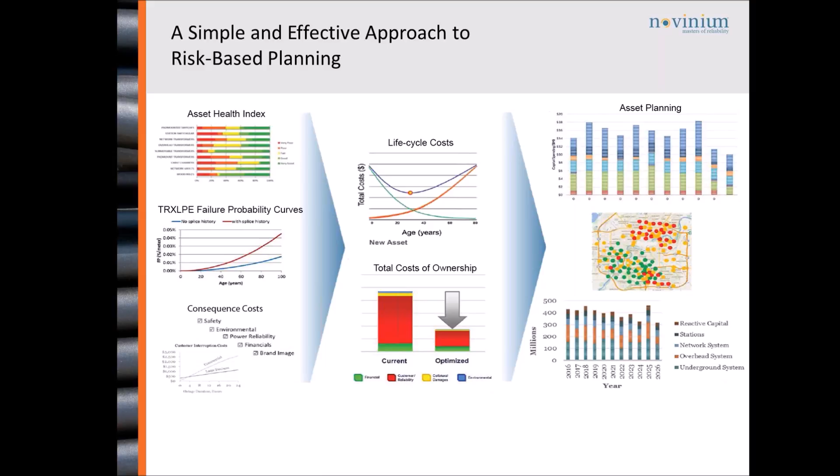In terms of the cable planning approach, this really begins by looking at the utilities' data relating to cables. That includes condition assessment information that can be used to determine the failure probability of the cable, and it also involves the quantification of the cable's impact if it fails. These two components can be used to measure the risk of cable failure, which can ultimately be used as part of a life cycle costing and total cost of ownership analysis.

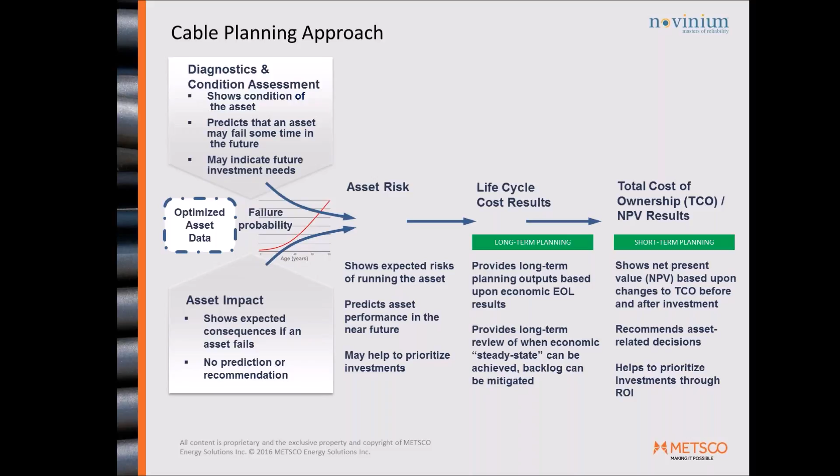So I want to talk about the individual building blocks that we're using as part of this risk-based assessment, beginning with the cable's condition assessment or health index. How do we develop a health index for cables?

Well, we start by building an architecture with the help of subject matter experts at a utility who have knowledge of the specific types of cables or subtypes of cables that are introducing problems within a given distribution or transmission system. We also look at all of the different types of data available on underground cables, including testing, maintenance, and inspection information. From all of this we're able to develop an architecture that can be used to quantify individual health index results for each individual cable segment.

That will be done using the individual cable's asset age, the inspection data and local data that we have on that cable, as well as degradation factors which are individually weighted as they relate to the overall probability of failure of the cable asset.

Some of the issues that we've seen with polymeric cables, especially those installed between the 1970s and 80s, include water tree phenomena, imperfections with respect to the jacket and semicon, and this can lead to issues such as overheating, partial discharge, and leakage around the splice, joint, and terminations, tracking and erosion. With oil-filled cables, we also see dryness phenomena.

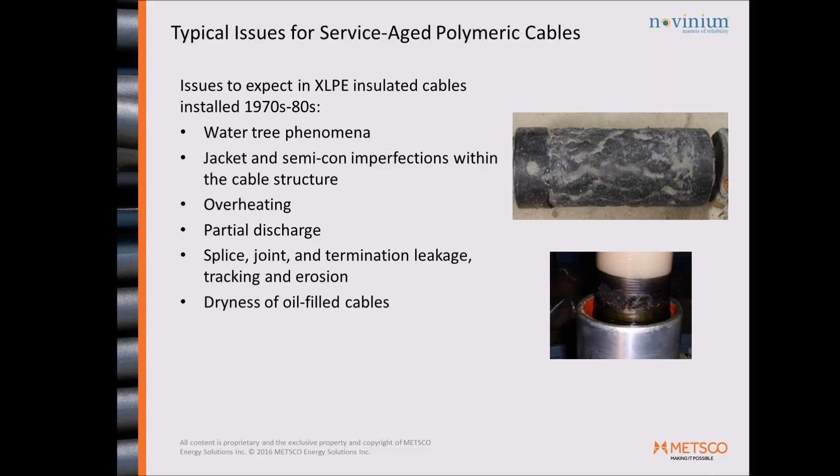So how do we combat all of this? We can develop a health index for cables, and this shows an example of how a health index can be implemented for polymeric XLPE cables.

Now, the health index is going to contain individual degradation factors. Degradation factors result in irreversible damage to the cables, resulting in the overall probability of failure of the cable asset. In this example, we have three degradation factors, including the service age, historical failures or cable failure analysis, and then the cable's historical utilization or loading history.

Each degradation factor is going to be individually weighted as it relates to the probability of failure of the cable. Then depending on the utility's processes, either a letter grade or a numerical score will be assigned to each degradation factor, and each degradation factor will carry a maximum score that it can achieve.

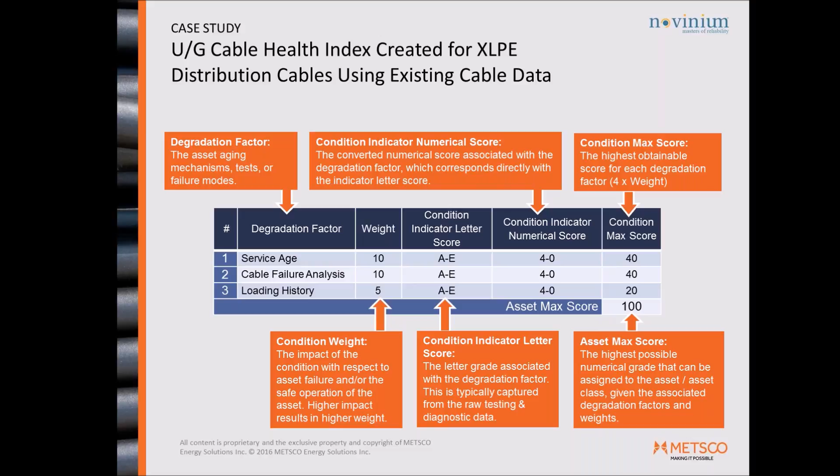In this example, the highest score that could be assigned to this asset would be 100, meaning that it would be in very good condition. And the lowest score, which would be a 0, would mean that the asset is in very poor condition.

Now, each of these degradation factors is going to have individual grade levels, and there are definitions for each grade level. So in this example, we see that based on the service age degradation factor, if we have a grade of A assigned to a given cable, it also carries the youngest age—younger than 15 years. If we have a grade of E, it's going to be older than 45 years of age.

And we can translate those letter scores into numerical scores. So the grade of A, the highest, translates into a score of 4. The lowest E translates into a score of 0. We see similar grades and definitions for the other remaining degradation factors, for cable failure analysis and for loading history.

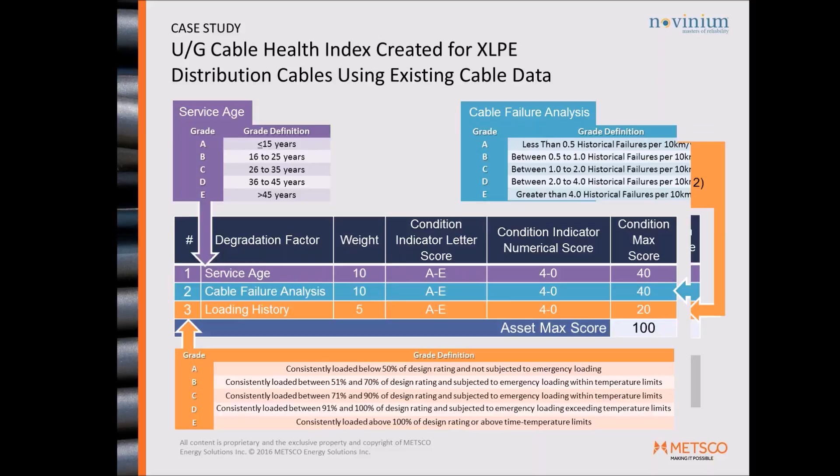So if I take you through an example, we could have a cable that has a score of 3 and a weight of 10 for service age, which translates into a service age score of 30. In terms of the failure analysis, maybe it has experienced a lot of failures, so it ends up with a score of E or 0, and failure analysis is given a weight of 10, so it would be assigned an overall score of 0.

Then the loading history, perhaps it's been assigned based on its utilization a score of C or 2, and loading history carries a weight of 10, so it would get an overall score of 20. Based on these individual scores—0, 30, and 20—we subdivide this into the maximum score that could be achieved for that cable segment, and we translate that into a percentage.

In this example, we end up with an overall health index of 50%, or fair. As I mentioned before, the health index numerically can vary from the best score of 100, which is very good, to fair, to poor, all the way down to very poor—and very poor would be anything between 0 to 30%.

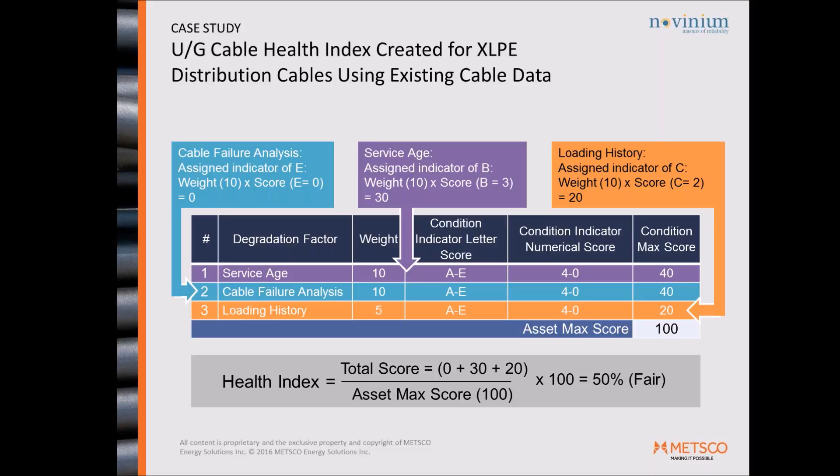Now, based upon these results, this can provide an immediate view to utilities on what assets they should replace and what backlogs they would face depending on the different health grades. So how many assets do utilities have that are, for instance, in very poor and poor condition, which would need to be managed in the near future?

And the replacement value, that's really based upon the total cost of replacing or rehabilitating that equipment based upon material and labor cost.

Now, the last step is we want to be able to translate that health index score into a condition-based failure probability result. In this example, based on the green curve, we see that this particular cable is failing at an accelerated pace based upon its health index result.

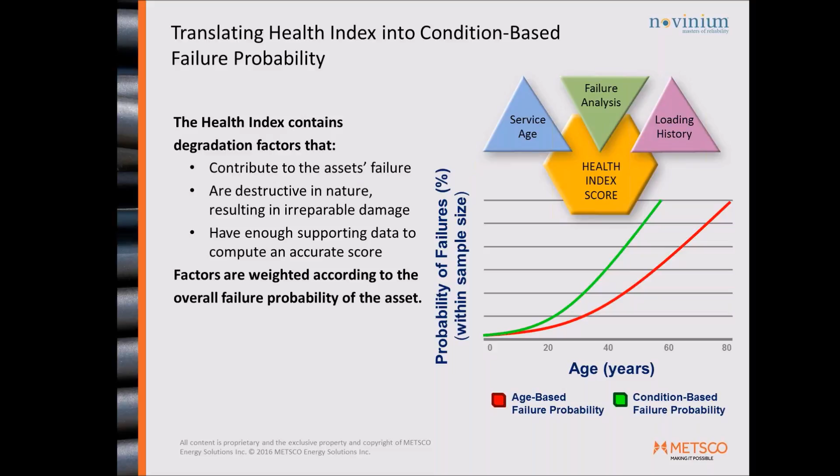So I want to talk a bit more about the failure curve calculation, how that allows us to predict the failure of the asset based upon either the age or the condition. How are these failure curves developed? It really starts by looking at the asset life data for each of the asset classes, including underground cables.

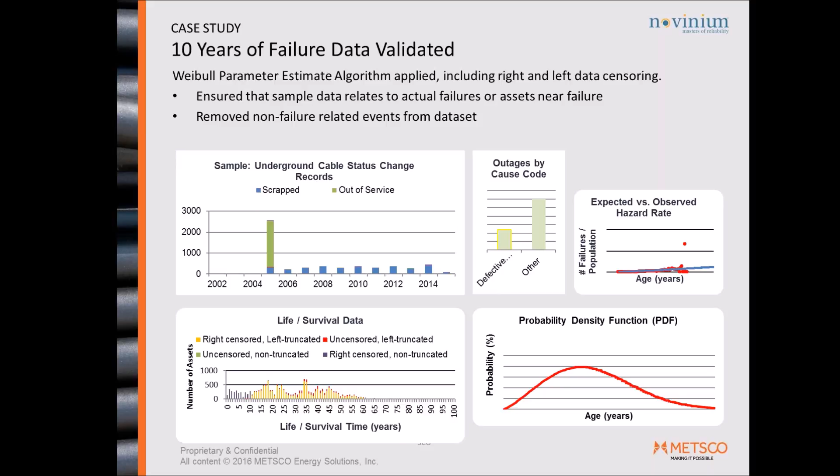So we're going to look at when the cables were first installed and when were they ultimately removed from service. We want to make sure that the data has been properly filtered such that we are only including those cables that actually failed or had been proactively replaced due to imminent failure. And if that information is acceptable, we can include all of that as part of what we call a probability density function, or PDF, and that will eventually get translated into a hazard rate function, or HRF.

Here's an example of what that hazard rate function looks like. The hazard rate function is really the final failure probability curve that relates the asset's age to the failure probability. This is an example for cables. And in the case of cables, not only are we looking at the age, but we also look at the length, because the failure probability calculation is computed on a per meter basis.

In this particular example, we see that for XLPE cables, when the cables had historical events or splices, so splice history, we found that the cables were 3 times more likely to fail as opposed to cables that had no splices at all.

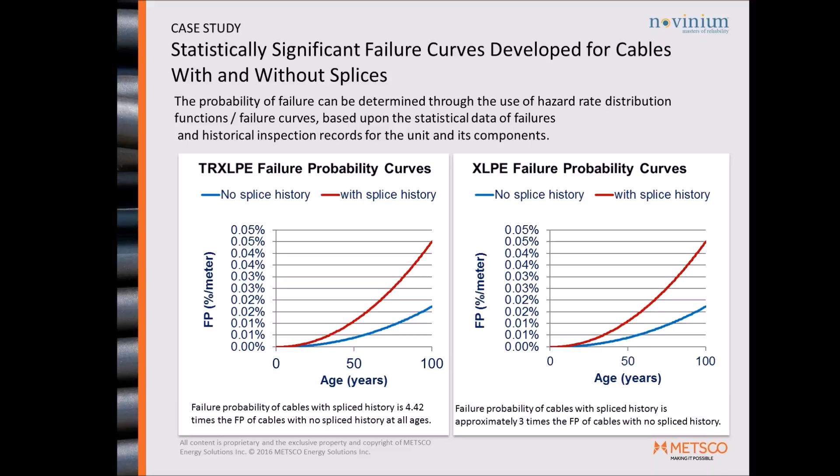So once we've determined the probability of failure, the next step is to figure out what's happened when the failure occurs. What are the consequences or the impacts of failure?

As an example, if I look at this chart at the top here, I see a given asset. It has a failure probability of 5%. We can subdivide that 5% into different failure modes. And here we see a specific failure mode table for cables.

These are cables in cable chambers. We have XLPE and PILC cables in cable chambers. And each one has a specific failure mode assigned to it. We have relative probabilities for each one.

So we're saying that a cable, 95% out of that 5%, it could be just a normal failure, or 4.5% out of that 5%, it could be an instance where the duct has collapsed or there's no spare ducts available, or maybe 0.5% out of that 5%, it could go completely catastrophic.

And for each one, we want to try to figure out, well, what are the root causes that could result in those failure modes? And then we also want to figure out, okay, what were the outage durations? What was the impact to customers? And then were there other impacts in terms of collateral damage? Were there environmental impacts? What is the overall scope of that outage? We want to consider all of those things when we are measuring the impact of failure.

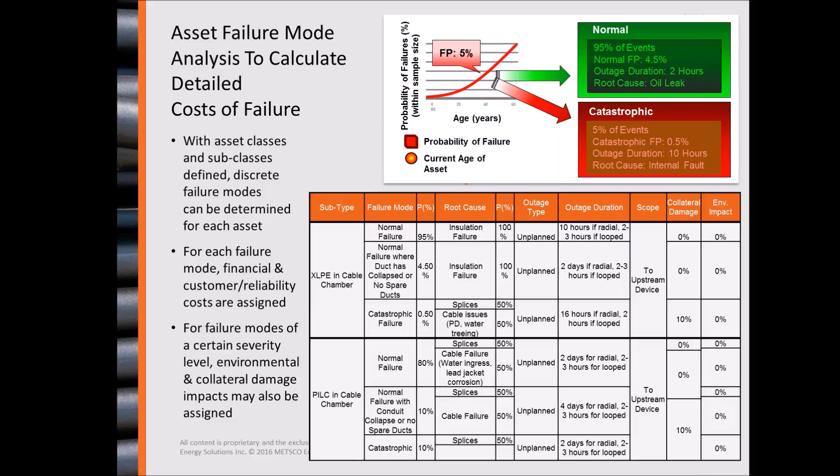In terms of some of the data that we would use when we're trying to monetize the impact of failure, we want to try to take a look at outage information, historical injuries that have taken place, take a look at some root cause analyses of damaged equipment, property damage, data on oil spills and leakage, take a look at any cases of death, revenue loss, and claims that may have been filed against the utility.

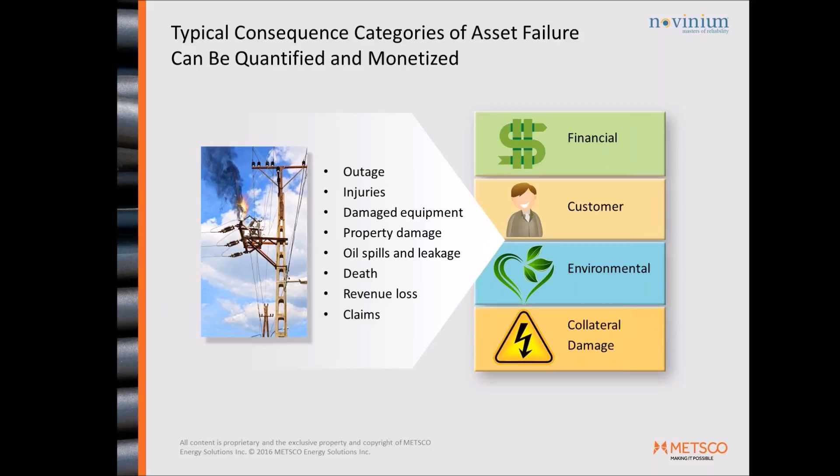And then all of these can be used to establish different categories of consequence for a utility. The most frequent categories we've seen used include financial - these are the direct costs of intervening on the asset, so either replacing or rejuvenating a cable, for instance. There's the customer impact, in terms of the reliability impact that the customer sees when the outage occurs. There's environmental impacts - those could be things as they relate to oil leaks, PCB leaks, and then collateral damage impacts. That can relate to anything related to safety, injury, damages to adjacent property when a catastrophic failure is taking place.

Now, the customer impact is obviously one of the most critical elements. And how do we come up with that customer impact? Well, we use customer interruption costs, and those are derived by really understanding what's happening when an outage takes place.

Then you have the duration stage where the customer has readjusted their activities to account for the loss of electricity, but their inconvenience is still proportional to the duration of the outage. So we monetize that in terms of dollars per customer load hour, or dollars per kVA hour.

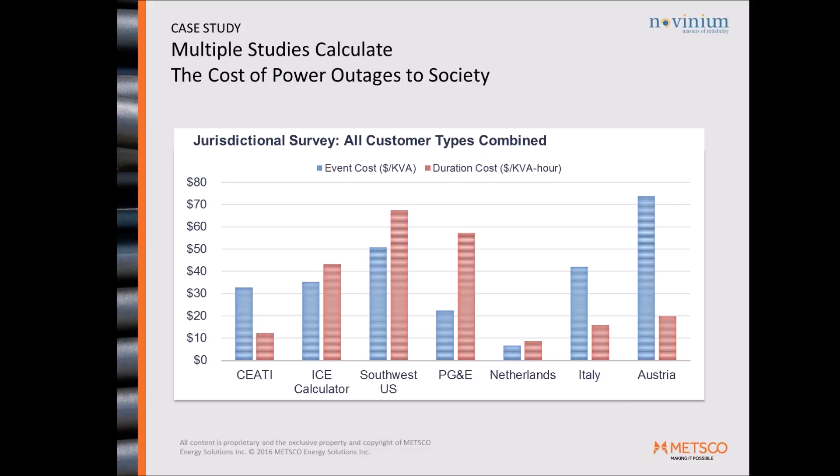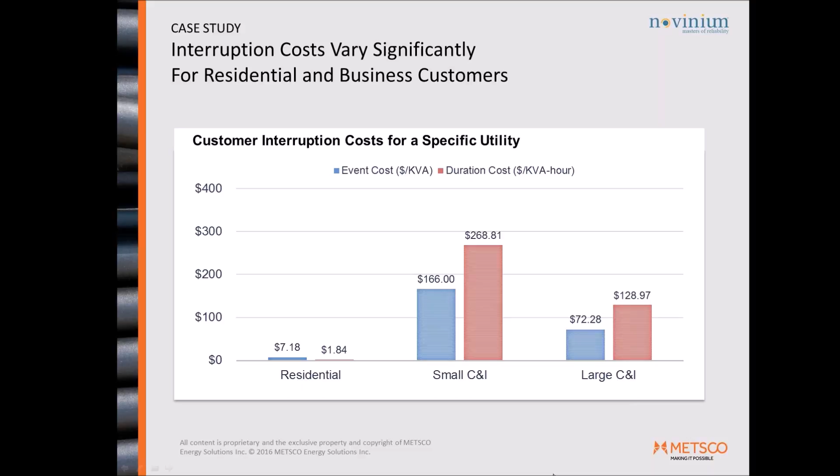Now, these numbers are typically generated by performing a series of surveys and advanced studies with customers in different regions across the world. We see some studies that have been done in North America and some performed internationally to arrive at different event and duration costs. We also see that these costs can vary substantially depending on the class of customer, from residential to small commercial and industrial to large commercial and industrial. We can see some substantive differences in these event and duration cost parameters.

It's important to note that for residential customers, typically their value of reliability is monetized using a willingness to pay model, asking customers how much would they be willing to pay to avoid an outage, compared to the data from small and large C&I customers, in which there will typically be direct revenue impacts and data available.

I should say that for residential customers, we are seeing more of that data, direct tangible losses, coming into perspective for that customer class as well, as more customers begin operating businesses from home or working from home. So there are more revenue impacts that are becoming more relevant.

But for now, if you just look at willingness to pay, what we see is that while we look at number of customers, the willingness to pay compared to small and large C&I clearly dominates. But then in terms of how we convert all of that into a cost, recall that in our formulas we're using the consumption, and the consumption of residential customers typically has to be weighted against the consumption of large and small C&I.

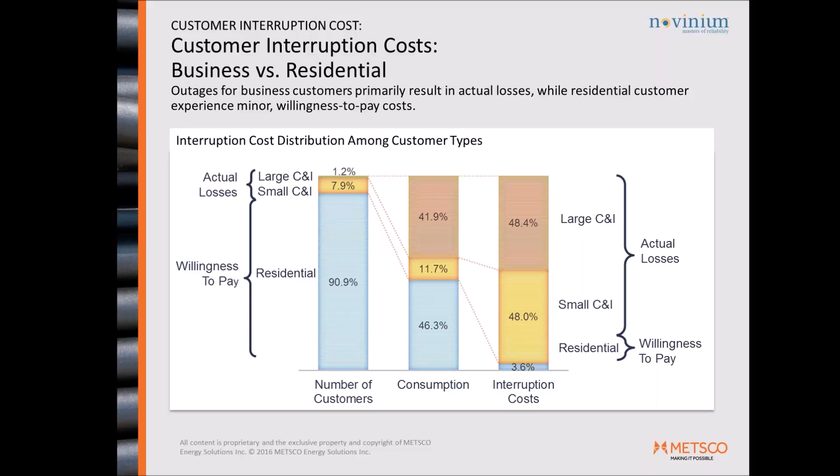And when we actually convert all of this into dollars, we see that the final willingness to pay value is actually a very small amount when measured across an entire utility system compared to the total net dollar amounts for small and large C&I, which represents the actual losses being experienced. So what this shows is that when looking at customer interruption costs across an entire system, it's really the actual loss data that's dominating the equation compared to the minor willingness to pay costs.

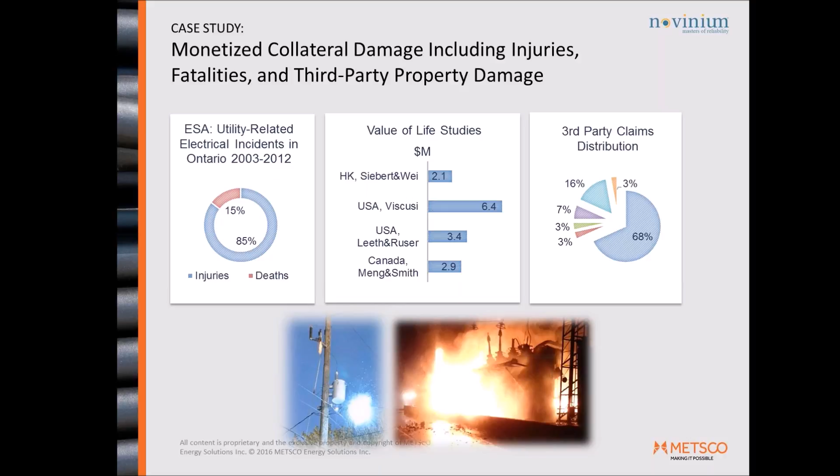Of course, we have to look at other impact categories, including collateral damages, which would be a combination of things like safety-related incidents, the value of a life, claims filed against the utility. These are just some examples that have been performed for utilities in Canada.

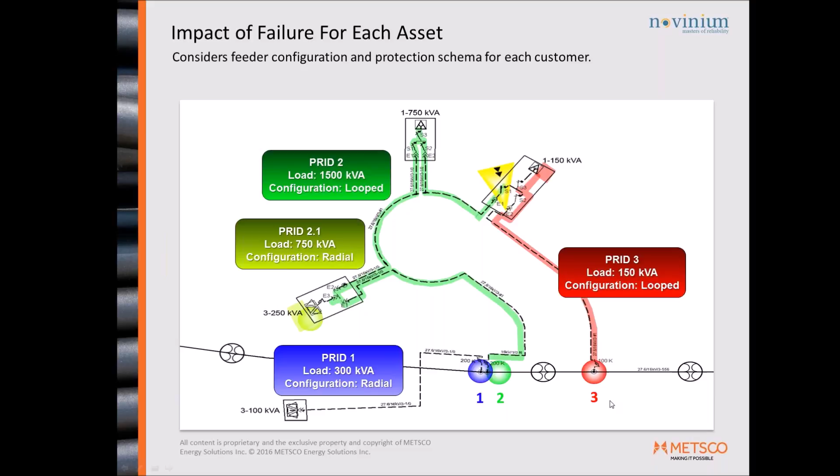Now, once we've established the probability and the impact of failure, we can establish the risk, and then more critically, we can figure out when do we want to intervene on the asset, and most importantly, what type of intervention do we need to apply?

Utilities are always facing essentially more and more challenges at a regulatory level. Regulators want to ensure that the utilities have considered every possible intervention option. And for cables, most importantly, it's critical that both replacement and rejuvenation are considered as part of an analysis.

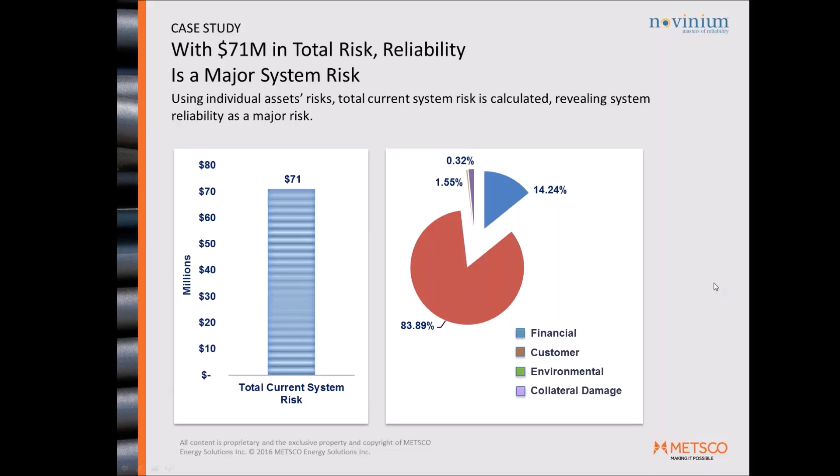So when looking at the total risk that can be measured within the system, once we've figured out the probability and the impact, we can measure what's the total system risk. In this example, we see just over 70 million in risk across an entire system, and we see that the customer portion of that risk is clearly dominating, which is to be expected as reliability remains a critical element within any electrical system.

Optimally, we want to replace or intervene on that asset at its minimum operating cost. But we have to consider that the existing asset to be intervened upon and the new asset to be installed will have different risks. For instance, you could have a direct buried cable as your existing asset, which may be replaced by a new asset in concrete encased conduit.

So we have to consider the existing asset's risk cost curve, and cross-reference the minimum operating cost of the new asset to the existing asset. This tells us that at some point in time, it becomes more costly to keep the existing asset in place compared to the minimum operating cost of the new asset. That's when we should intervene on the existing asset. We refer to this as the optimal intervention timing result, also called the economic end-of-life criteria of the asset.

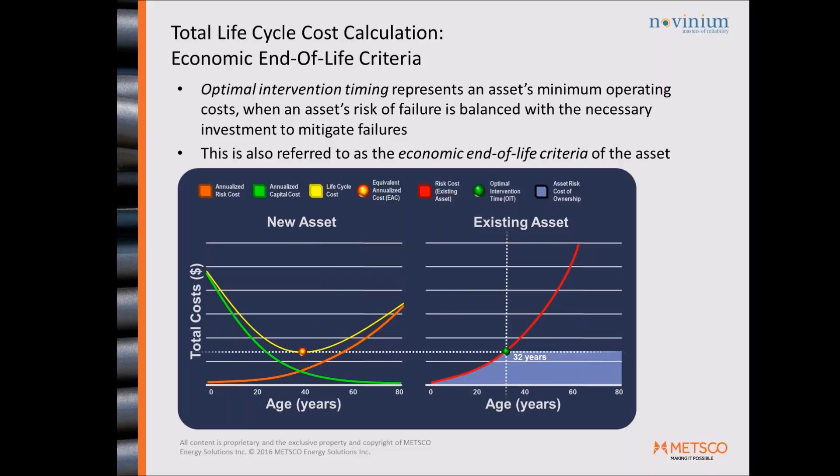When considering underground cables, we have to consider the different intervention options available. Cable replacement can be very expensive, especially when replacing direct buried cable with new standardized cable and conduit, or cable and concrete encased conduit. That's where cable rejuvenation can be considered as an alternative intervention, allowing for the extension of cables using a low-cost cable injection procedure.

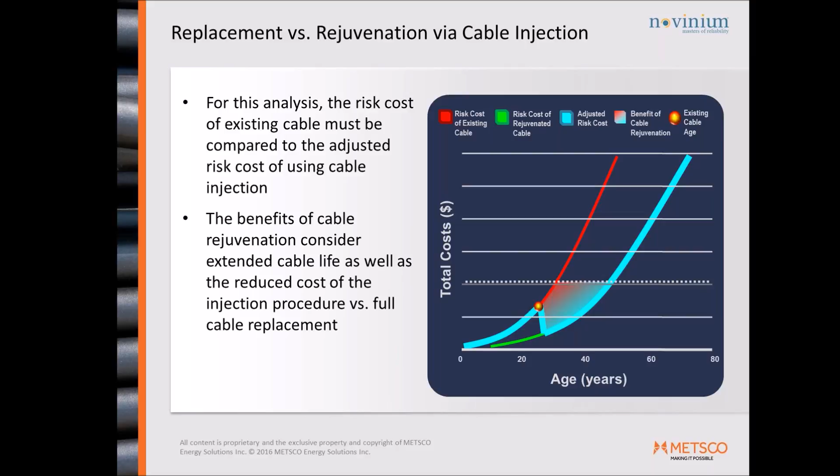What we want to do is calculate the difference of that adjusted risk, or the NPV of this shaded area here. That is really the benefit of performing cable rejuvenation as opposed to replacing the cable outright. This net present value calculation tells us whether we have sufficient benefit to perform cable rejuvenation versus cable replacement.

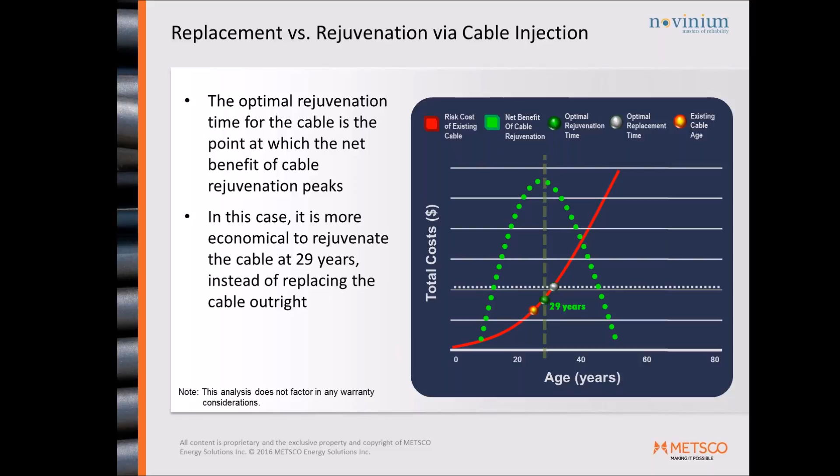When we perform that NPV, we end up with this parabolic function, this green curve. At the top of that green curve, cross-referenced to the asset's risk cost, we can pinpoint the exact time to rejuvenate the cable. We want the cable's current age to be within the parabola, and the optimal rejuvenation year to come before the replacement time. In this example, it's more economical to rejuvenate the cable at 29 years as opposed to replacing it outright.

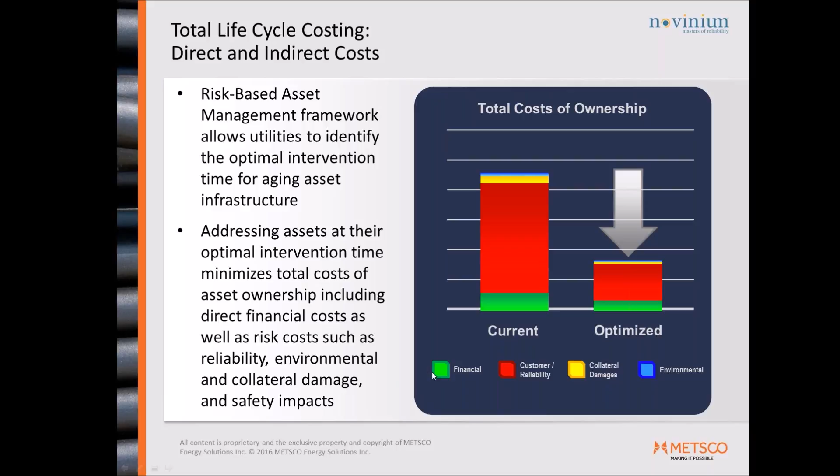When utilities follow this framework and intervene on their infrastructure at its economic end of life, they are reducing the total cost of ownership. It's this reduction in total cost of ownership that we want to look at when capturing the benefits of doing the work. The difference in total cost of ownership becomes the net present value, or the benefit of doing the work—again taking into consideration the financial, customer reliability, collateral damage, and environmental categories.

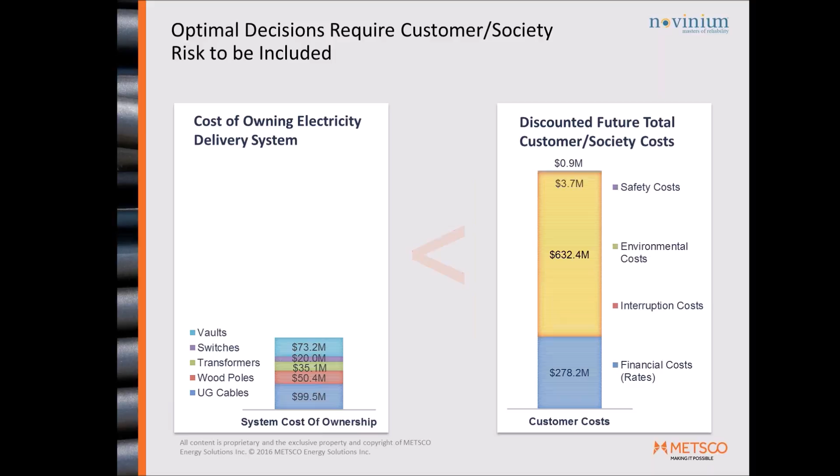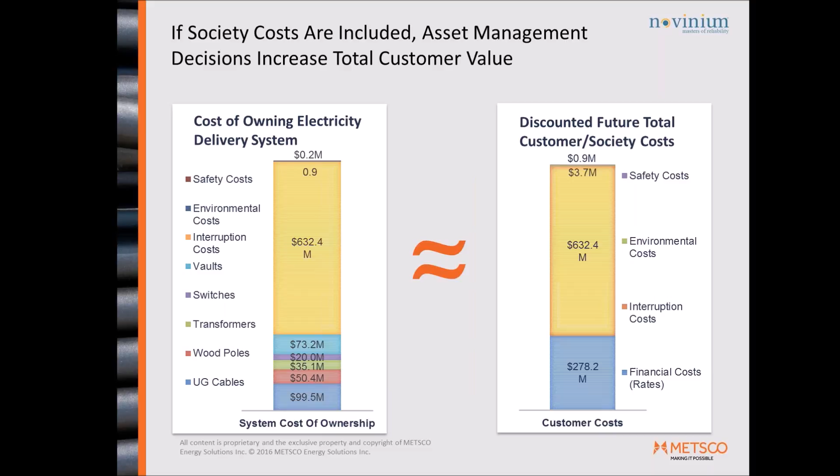We always have to include customer and societal risks as part of this analysis. If we compare just the physical costs of ownership to the utility—the asset-related costs, like vaults, switches, transformers, poles, and cables—that clearly doesn't relate directly to the total customer societal costs. We have financial costs related to the rate base, but also costs related to interruptions in the system, environmental impacts, and safety costs. All of these have to be considered within this calculation, and that's the only way to come up with asset management decisions that truly take into account the total customer value.

Once we've applied this approach to an entire population of underground cables, determining their economic end-of-life criteria, we can come up with a long-term investment profile like this, which tells us which cables we're going to replace, which we're going to rejuvenate, and at what time to perform those interventions. At year 0, we have a backlog of assets that must be intervened on. When the utility has intervened on all those assets and mitigated the backlog in that first year, we say the utility has achieved an economic steady state by minimizing total cost of ownership across the entire system or for a given asset class.

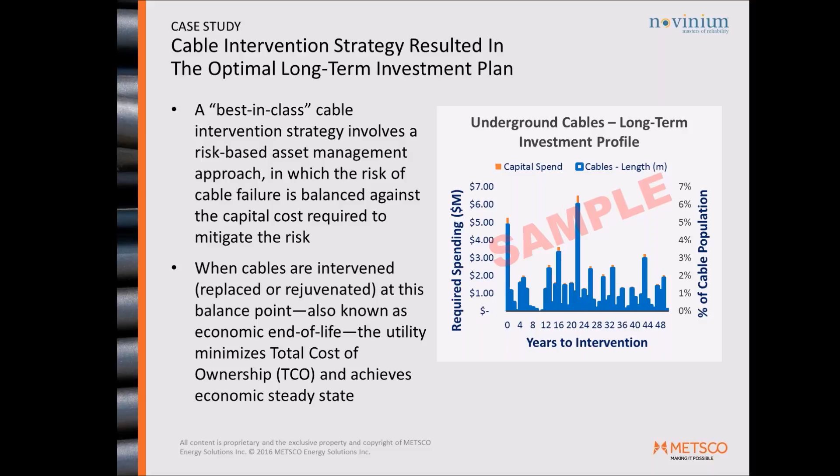This cost of ownership analysis can extend into other areas. We can look at different investment alternatives for a population of underground cable infrastructure. For instance, we can continue to run cables to failure, or defer investments and just install a series of fuses and switches, improving operating flexibility and reducing further impacts of failure, or we can perform full cable intervention at once, rejuvenating and replacing a series of cables all together. Each of these strategies can be compared by looking at the net reduction in total cost of ownership.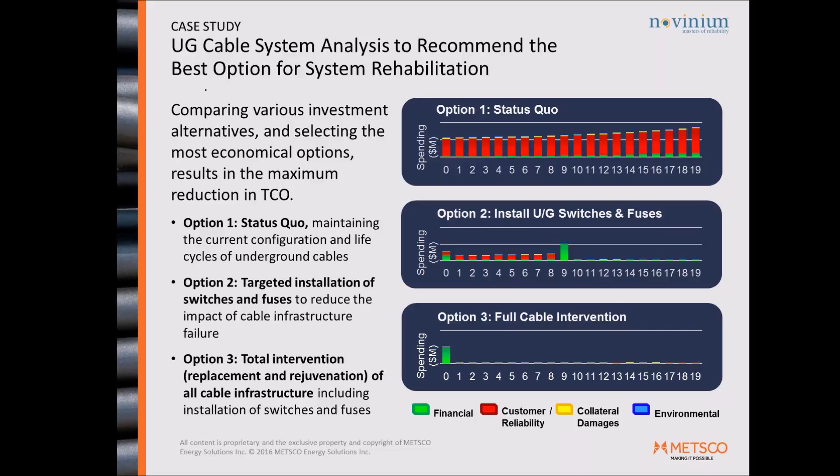Here's an example considering three options. In the status quo option, running to failure, there's really no change in total cost of ownership, so the net present value is essentially zero. If we choose to replace or rehabilitate assets at their optimal intervention time, we see some benefit. But it's only in options 2 and 3 that we start seeing a substantial increase in benefits. Option 2 means we defer investments and install switches and fuses right away, and we see a substantial increase in net present value, meaning we've reduced total costs of ownership quite substantially.

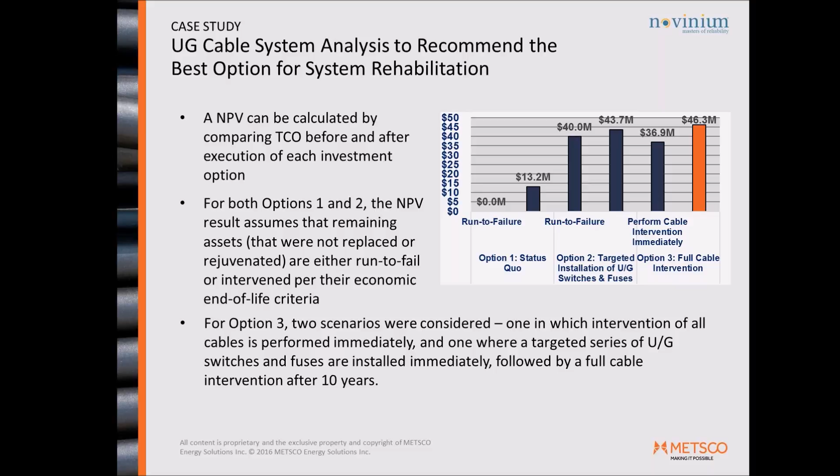In the third case, we're doing a full cable intervention. In option 3, we consider two scenarios: one where everything is intervened, so cables are either rejuvenated or replaced all at once, or another where we install new underground switches and fuses immediately, then perform a full cable intervention 10 years from now. This gives us the highest net present value of $46.3 million, considering the cable's asset age and condition, probability of failure, and individual configuration data for impact of failure. It really tells us that it's better to perform targeted reconfiguration of the cable infrastructure immediately through switches and fuses, followed by a deferred replacement and rejuvenation of cables.

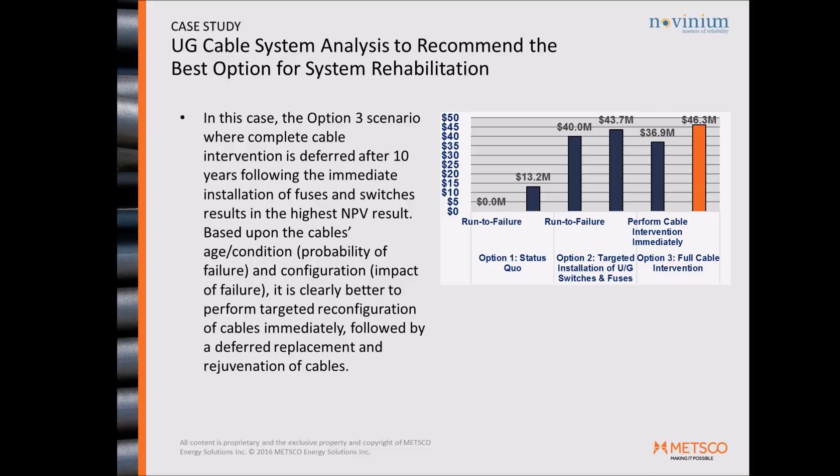So what are our conclusions?

Underground cables represent a critical high-risk asset class due to the many degradation factors that can result in cable failure, coupled with substantial financial and customer impacts of outages. A risk-based asset planning approach is really a best-in-class approach for cable management because it lets utilities predict when failures are going to occur. We can quantify the impacts of failure, considering all the different categories relevant to a utility, and determine when is the optimal time to intervene. This approach allows for different interventions to be considered.

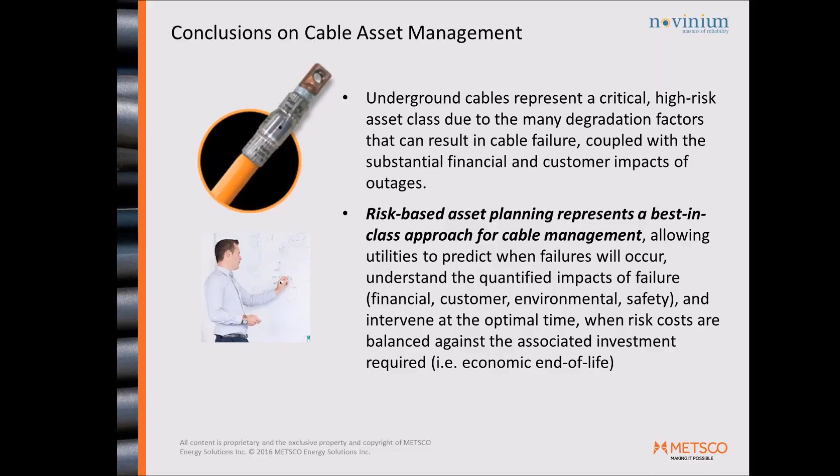In the case of cables, we're really showing regulators that we're considering all our options. Do we want to replace? Do we want to rejuvenate the cables? We're intervening when the risk costs and capital costs are all properly balanced against each other, using this economic end-of-life criteria. Data optimization and validation, as part of continuous improvement, can help make failure probability and health index calculations more accurate.

Results can be further enhanced over time by introducing additional parameters. This approach should take into consideration the different alternatives and intervention options available to utilities, including replacement and injection. By replacing or rejuvenating cables at their economic end of life, this is how utilities are able to minimize their total costs of ownership.

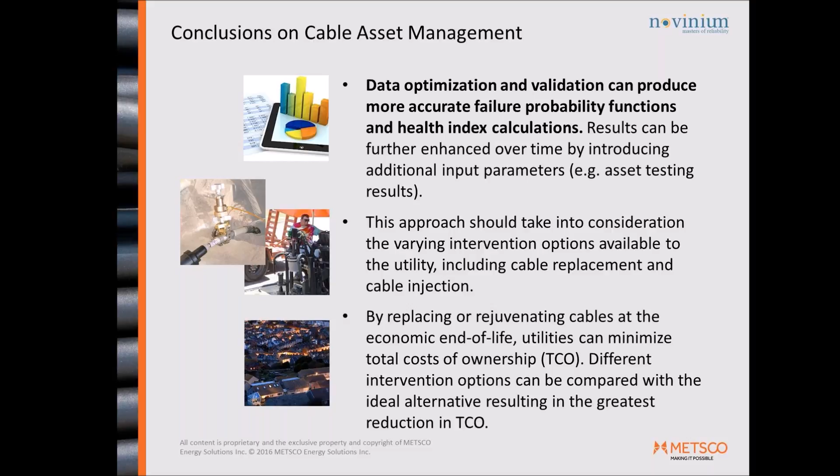All right, thank you, Robert. We have received some questions from our audience. The first one is, what kind of results do you usually get from this approach?

What we typically see with utilities, and this is because in most cases utilities have just transitioned into a proactive asset management approach after formerly running a lot of their infrastructure to failure over many years, is a backlog of equipment that needs to be intervened on immediately. So what the utility needs to do next is develop a long-term program that aligns with their resource constraints, system constraints, essentially what they're able to execute operationally, and then they can determine when that backlog is going to be mitigated over time, or when they're going to achieve that economic steady state through the investments they're performing.

All right, thank you. And our next question: your health index includes maintenance and inspection data. What do you collect as inspection data for buried cables?